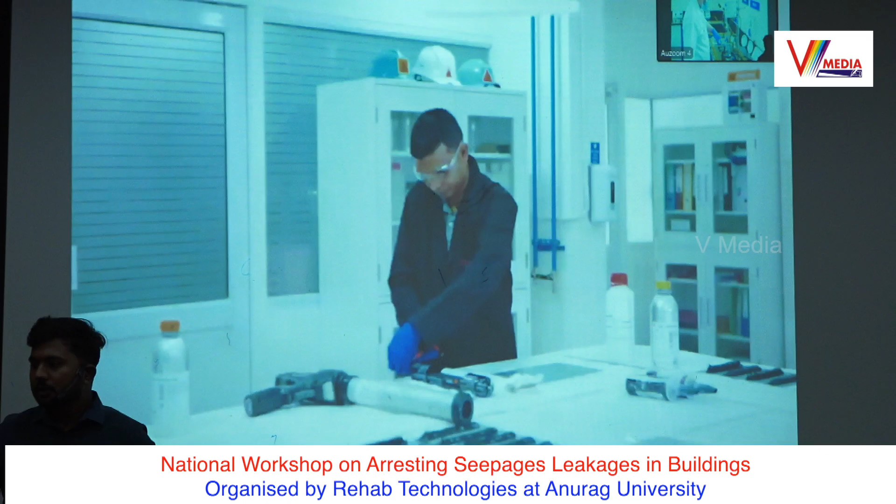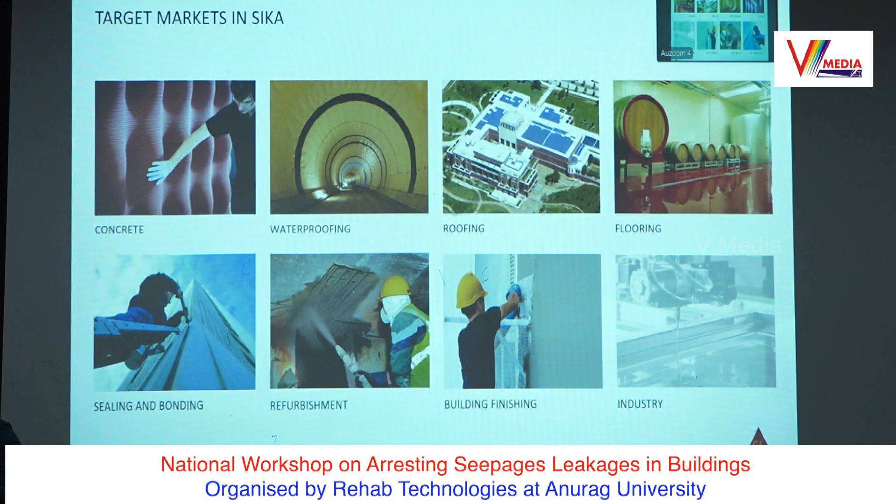So this is just an introduction to Sika. In target markets, concrete admixture is one division, and then waterproofing, where we have roofing, which comes under terrace waterproofing, and podium waterproofing. Floorings is a separate division. Sealing and bonding is again a separate division, like sealants in automobiles. Industrial sealants are a separate division in Sika. We have a refurbishment segment, as Sir explained various products; similarly we have them in our portfolio. Building finishings and industry are the various target markets in Sika.

And what is waterproofing? Why will we do waterproofing? Waterproofing is chemicals applied to the surface to control seepage, and we need to adhere to proper surface preparation techniques as well, like treating the cracks and treating the joints. Only after that can we proceed with any waterproofing coating. The concrete should also be good, and the waterproofing coating is an additional benefit you provide to the structure, which will increase its durability.

So where is it used? What are the scopes of work where waterproofing is used? From basement to roof. Basement, terrace, roof, podium, wet areas, swimming pools and balconies. Wherever there is feasibility of water entrapment, those areas should be waterproofed. We have product technologies based on the scope of works, like waterproofing mortars for wet areas and balconies, and bituminous sheets for the terrace.

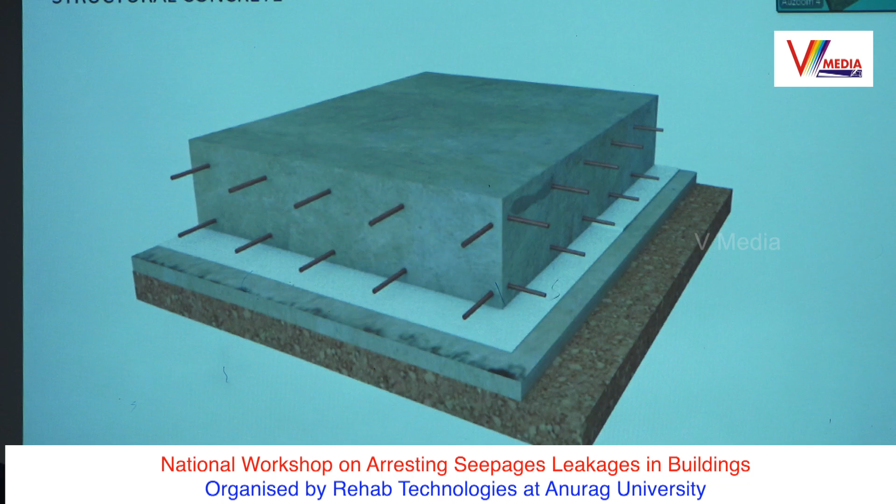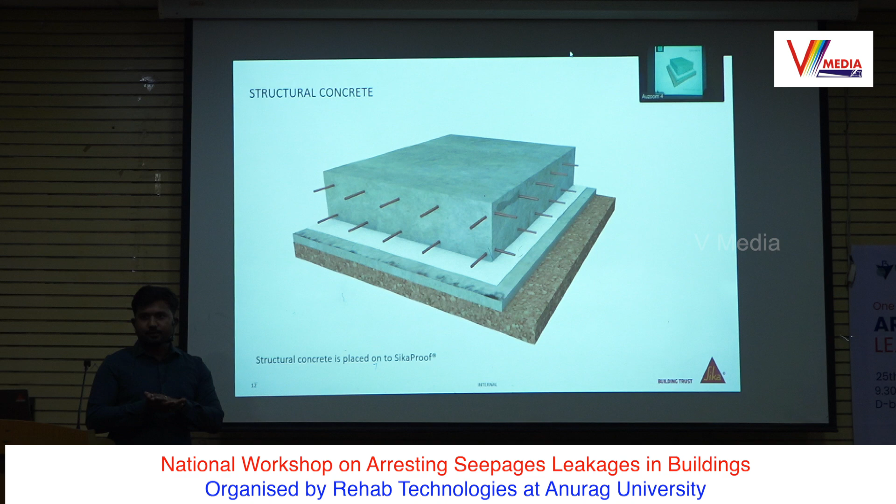So how this reacts is, the mechanism is there will be a pressure sensitive adhesive over the HDPE membrane, which will react with the RCC structure. The HDPE will not be bonded to the PCC surface, it will be bonded to the RCC surface, so that there won't be any water entrapment for your RCC structure. The HDPE will be loosely laid over the PCC, and then it will be adhered to the RCC surface. This is the major mechanism you should know about the HDPE.

We also study the requirement. We don't go for HDPE waterproofing directly. We will also study the soil report, and how many basements the structure has. Suppose for a 50 floor building, you will be going for a 3 basement structure. So how is the water table there? That is the major criterion for selecting which type of waterproofing system. If the water table is above the B2 level, basement 2 level, then definitely you need to go for HDPE kind of systems. This is the major criterion for selecting any waterproofing system.

Coming to the retaining walls, we have different systems. I just want to introduce this system because it is manufactured in Jaipur by Sika. This is a wet applied SBS system. Even with moisture content this will work. Generally with moisture content you can't place SBS membranes, where you need to apply bitumen primer, which generally requires moisture content less than 4%. Whereas in this system we have a cementitious adhesive. I'll just directly explain the system.

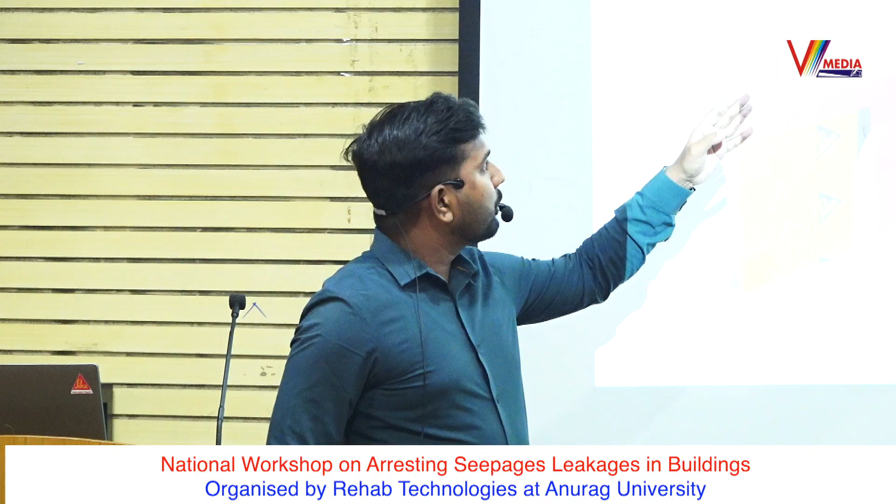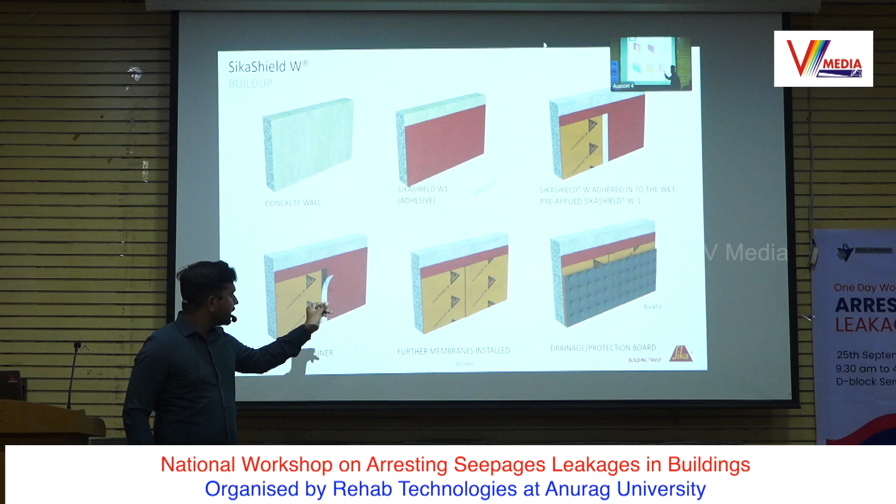This is the concrete wall, and after that you need to apply the SikaShield W1, which is a cementitious adhesive, and after that the SBS membrane is placed. Initially the surface preparation needs to be done, the construction joint treatment, and the tie rod packing, and further you can go for placing of the SBS membrane. Again, a 70 mm lap will be given with the membrane itself, and after that you can remove the self adhesive sticker and attach the dimple board over that. So this is a system for the retaining wall.

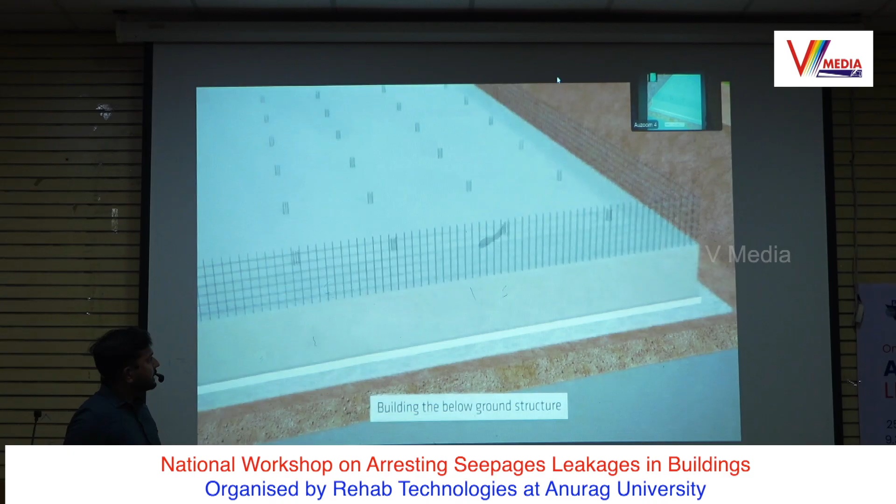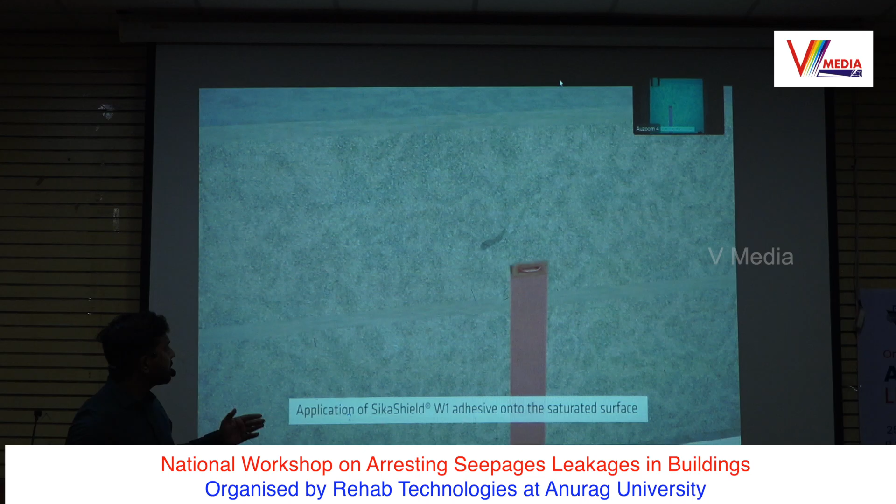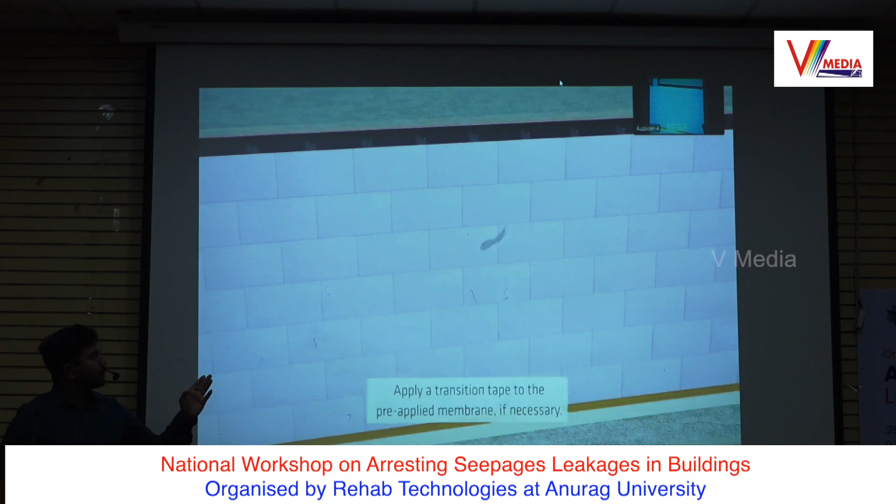This red color represents the water bar, and the concrete retaining wall has been laid. The adhesive should be applied in SSD condition. So the surface should be wet, pre-wet the surface, and then the cementitious adhesive is applied over that. After that you can place the membrane, with overlaps in the membrane itself. After that you can place the dimple board and backfilling can be carried out. This is a pictorial representation of how we do the waterproofing for individual footings with this wet applied SBS system.

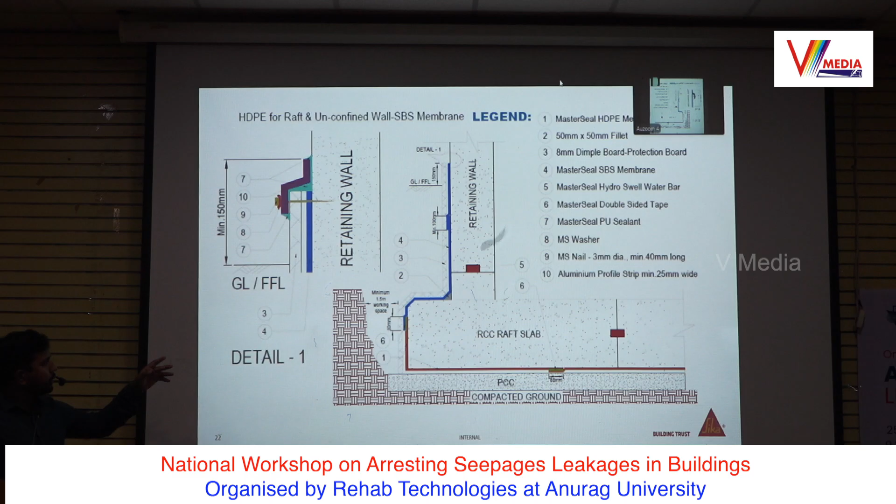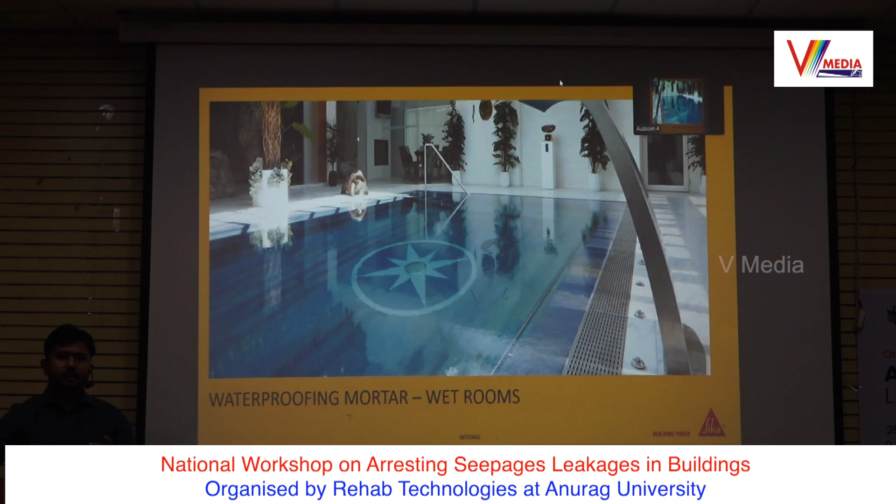This is another schematic drawing for the HDPE and SBS. The orange line represents the HDPE and the blue line represents the vertical SBS membrane system. This is one of the sites in Hyderabad. So this is a below ground structure. After that we are coming to wet areas. For wet areas we have different systems, like cementitious coatings. Generally we suggest cementitious coating.